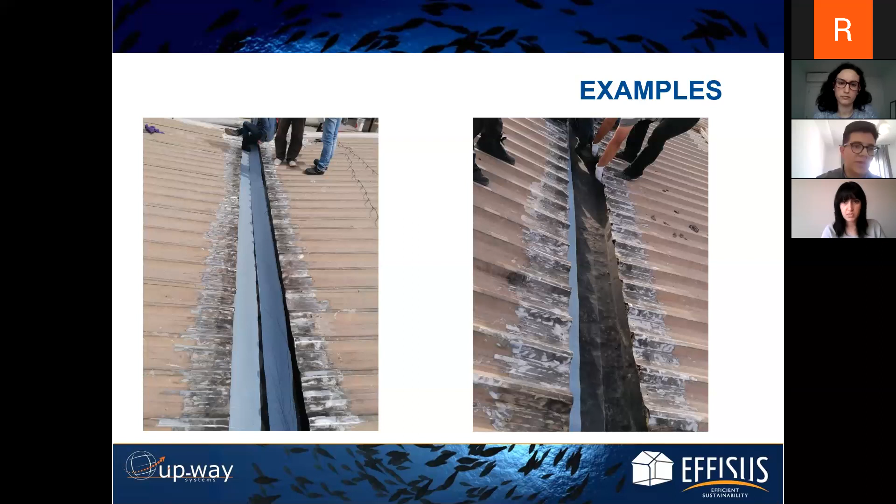Here are some highlighted aspects of the solution. As I mentioned, it's very simple and efficient because the base materials have over 50-year life expectancy. Compatible with any gutter that I mentioned, again, no accessories needed. I think this is a very important point to mention. You don't need specialized labor for this type of installation. So anyone can install this solution. What we do in most cases, if you have a very specific situation, we provide a technical submission saying how you need to install this product, followed by our installation manual.

And of course, since Effisus has teams located around Europe and around the world, our team can also go there if it's necessary to supply training, for instance, for the guys. Self-adhesive membrane, so when it comes to the installation, you just remove the foil and apply the bottom and then the sides. More on the installation later. And another important thing, it could be used to repair a gutter in its final state with just one precaution: if the gutter has no structural compromise. If there's very strong corrosion that compromises the stability or structural properties of the gutter, of course, we don't suggest using it. But when the structural element is assured, we recommend using the solution.

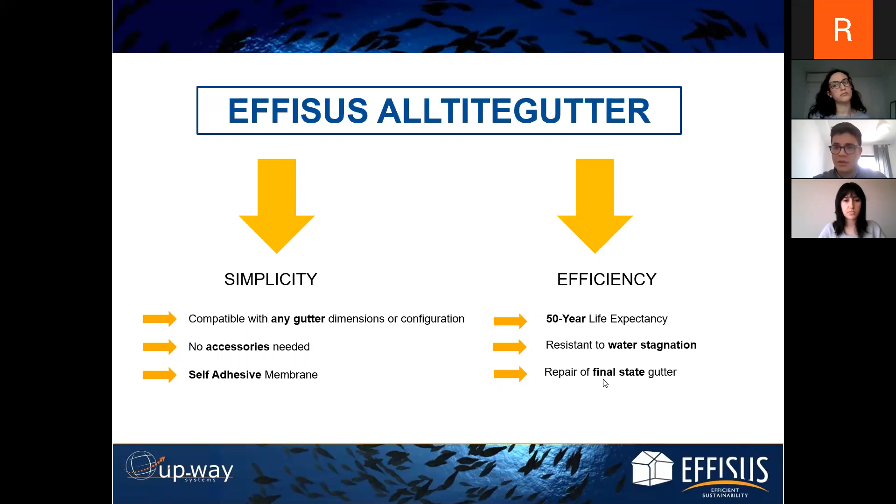When it comes to the installation, Mar, can you just highlight it for us? Yeah, absolutely. First of all, what the client or the person who runs the project has to do is confirm the dimensions, because as Alessandra said, we normally study every project, so we advise the dimension and the width. We have to advise the customer. So first of all, confirm the dimensions, and then when you have all the rolls unfolded, if the gutter is really in a bad state, we apply the primer and we wait for it to dry. If not, we directly apply the membrane.

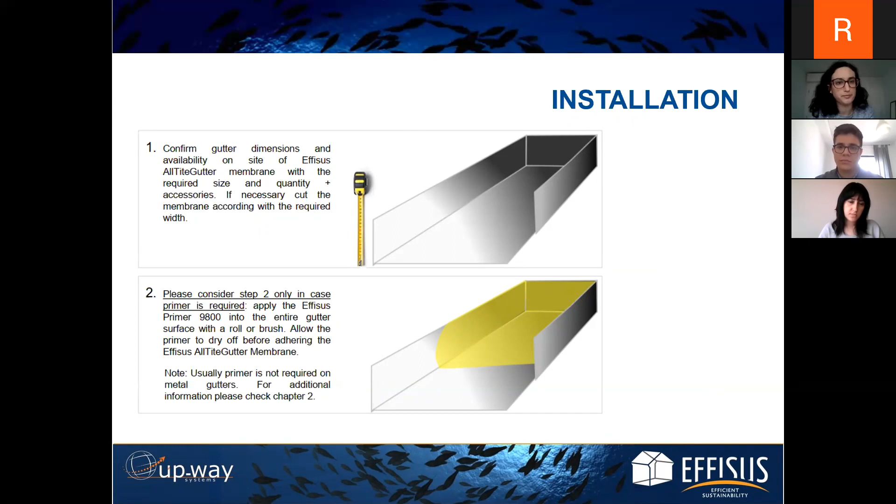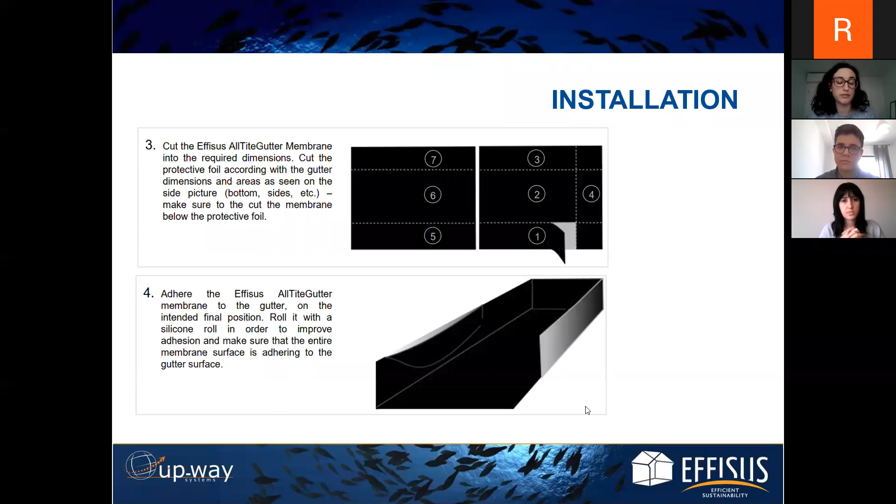After that we can cut the membrane. It's not really cut. We put the membrane in the bottom and the base of the gutter. We start step by step. Every 20 centimeters, we lay it down because it's self-adhesive, so it's really easy. We don't need anything else. And then we follow with the laterals, and after that the corners, if there are corners, of course. And in difficult or specific situations like drain outlets, we can, I think, yeah, okay, we can talk about this before.

Normally, the rolls are 10 or 20 meters long, and there are gutters longer than that. So we have to join several rolls. In this case, the overlap has to be 10 centimeters. And in this case, to protect the tightness even more, we use our Bond FT tape. We did the presentation, and if you look at our website, you can follow the steps for the Bond FT.

It's really easy as well. We apply the primer, then we put the Bond FT tape, and after all, the sealant, along all the perimeters. So it's really easy, and even with huge and small spaces, it's really able to do it.

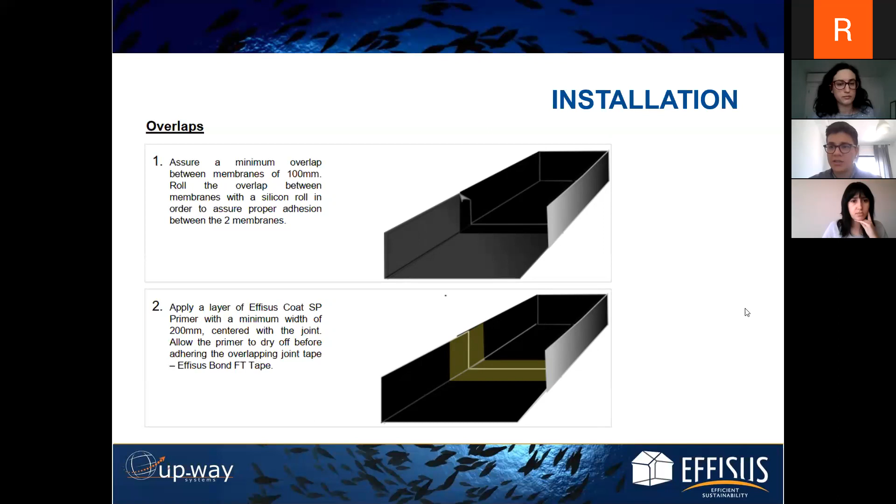Yeah, so Bond FT, just to summarize this part, Bond FT is our flashing tape. So when it comes to details and this type of flashing, we use this to assure this connection, these overlaps. Same thing here, you see it on the drain outlets. What we have here, you just apply the whole membrane. You have the connection there, and what we do is use the connection to the drain outlet. And around this area, we apply the same tape that we use on the overlaps, which is the Bond FT.

The Bond FT is also EPDM. It's uncured, this is cured, so it's the same properties. And in this case, we also have prefabricated connections with several diameters. But if it's not worth it, or we don't advise it in that case, we shouldn't put it. We can also use the Bond FT in the drain outlet. It's the same steps of installation, so it's really simple.

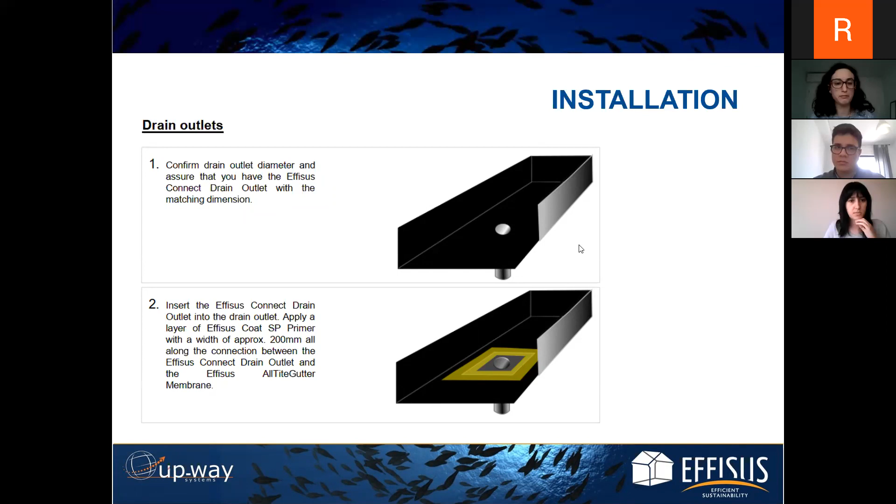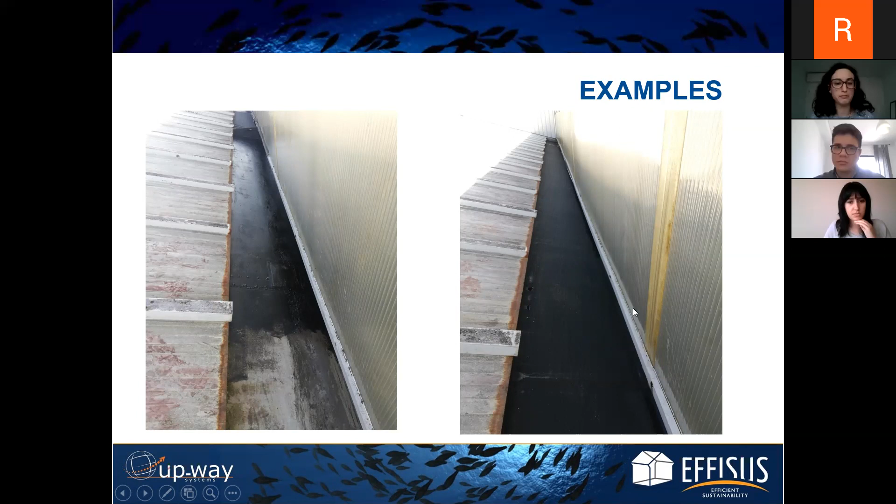So here is an example of the application. In this case, we decided again to apply the primer first. And then after the primer set and dried, as Mar mentioned, we have the installation of the membrane. We see here very limited sides, but again, there's no problem at all. It could be even higher. There's no limitation of this type. Here you see the connection where the membrane was applied. In this case the drain outlet connection was not used, as Mar mentioned, but the flashing tape, which is the Bond FT.

Alexandra, do you have anything to bring to us here? Do you have any recommendation besides the one we mentioned? Yeah, as Mar was saying, the Effisus Bond FT tape is used on this solution in any type of detail that requires a more flexible material, because with the Effisus Bond FT we can stretch it and adapt it to any shape required. So we use this to do the overlaps. We can use it, for example, to do the sealing details with the drain outlets, as we can see here on this picture.

Actually, on this picture, the application is not so well done, because the Effisus Bond FT should have gone lower on the drain. It should go a little bit deeper, yeah. Deeper, yes. But it's a self-adhesive membrane. It doesn't require heat or fire to be applied, so it's very flexible to use on details.

So following up your line, we also have a question here from Mike. What is the warranty and life expectancy of the product, Mar? Yeah, the warranty is 5 years, but we can study the situation and we can prolong it, depending on the project. We can say maybe 10 or 15. We can study that, but the standard is 5 years. And the life expectancy, as you said at the beginning, is 50 years because it's an EPDM membrane, yeah.